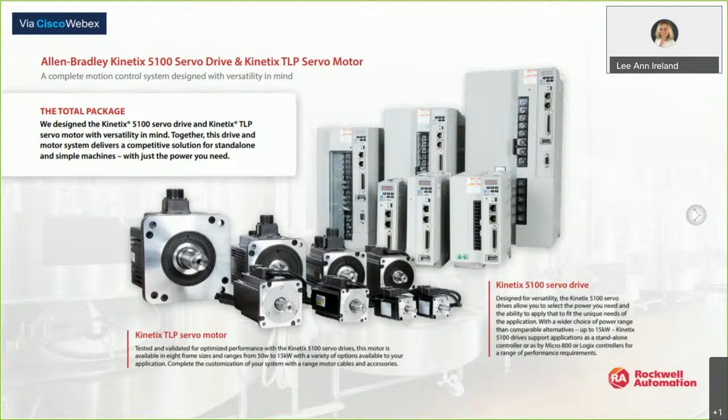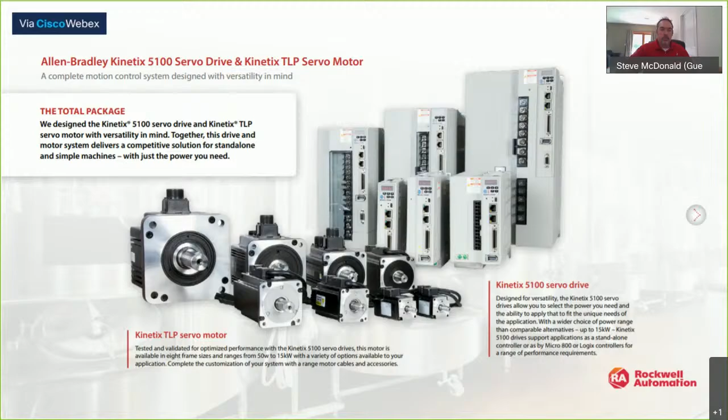As promised, the overview. Currently available is the 100 and 200 volt single phase and 200 volt three-phase drives. Soon we should see the release of the 400 volt class drives and motors. The Kinetix 5100 benefits include easy system sizing. We'll get into more detail on the drive and motor sizing in future slides.

Backward compatibility currently supports MPL motors for customers migrating from Ultra 3000s due to end of life, or the active Kinetix 300 models as needed for your applications. This year, we should see TL and TLY support for the Kinetix 5100 also. Very cost competitive, designed to run standalone with Micro 800 PLCs, discrete, or with CompactLogix or ControlLogix processors.

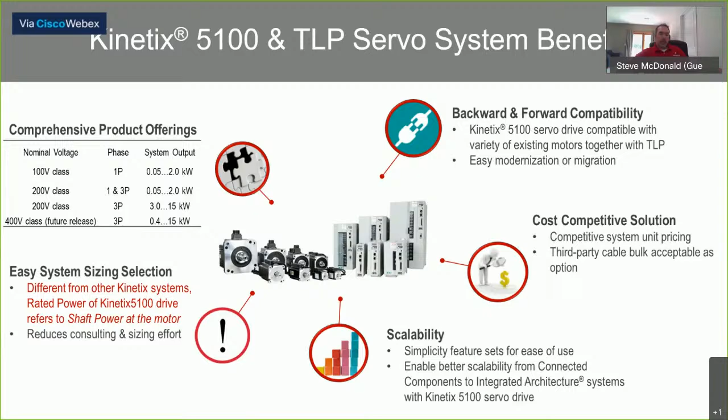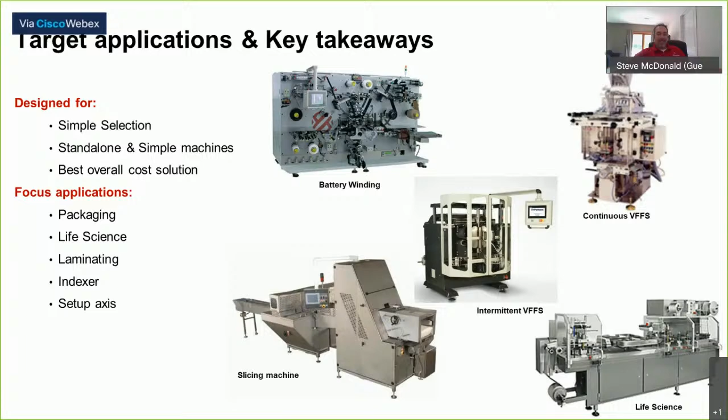Target applications. Here are some example applications designed to be easy to select, easy to use, cost-effective, yet full of features. The drive will run simple speed control, torque control, indexing, even advanced features like gearing and camming. Now let's take a look at the drive details.

Some key features of the Kinetix 5100 drive: hardwired STO or safe torque off, onboard I/O, 10 digital in and 5 digital out, 2 analog in and 2 analog out. These are all configurable. 2 fast digital in also. Auxiliary feedback port for second encoder or other feedback device for dual loop control as needed for your application.

Currently runs the MP and TLP series motors. Soon there'll be support for the TL and TLY series as discussed before. Remember, the 200 volt class motors, the MPA series currently. Soon, the 400 volt class motors, the MPB series.

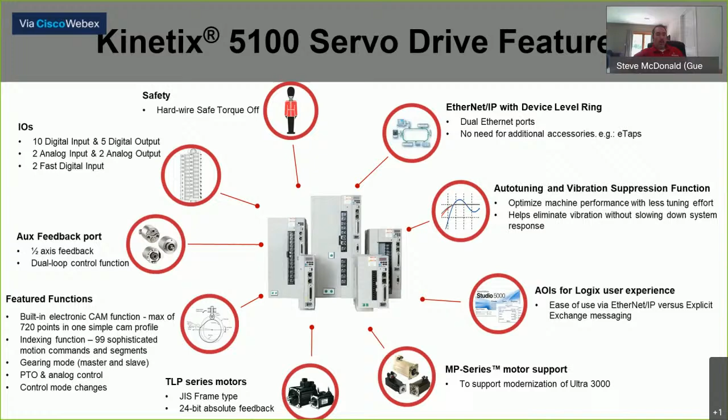There's a solid set of add-on instructions available for download from the Rockwell PCDC. If you're familiar with Rockwell motion commands, these add-on instructions will look and feel the same. Enhanced auto-tuning and vibration reduction features. The drive comes standard with dual port Ethernet for daisy chaining or DLR, device level ring.

Here's where the Kinetix 5100 sits in the Kinetix 5000 class family. Kinetix 5100, great for use on standalone or lower axis count machines. Use it with Micro800s, CompactLogix, or standalone, discrete, pulse train output, or analog. Coming soon, the Kinetix 5300 will add entry-level CIP motion for low axis count machines.

Next up, we have the Kinetix 5500. This has support for single cable VPL motors and network-based safety options for medium-sized machines with lower axis count. Next, we have the workhorse of the Kinetix line, the Kinetix 5700, for higher axis count or higher performance applications. This also adds advanced safety and regen power capability. Contact your local rep if you need specific application guidance for which Kinetix drive to select.

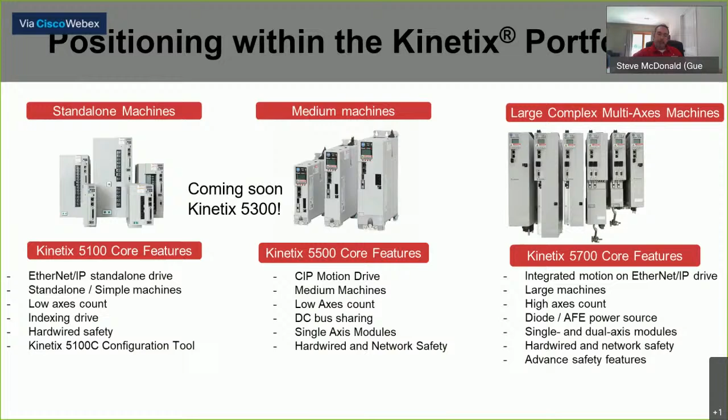Now let's get back to the main topic, the Kinetix 5100. There are 8 sizes, 6 frames, up to 15 kilowatt drives. You can run 95 to 132 volts AC single phase with reduced output power, or 170 to 253 volts AC single phase, on the whole range of drives. You can run 170 to 253 volts 3-phase input power today. Once again, there will be a 400 volt class input of the Kinetix 5100s out soon.

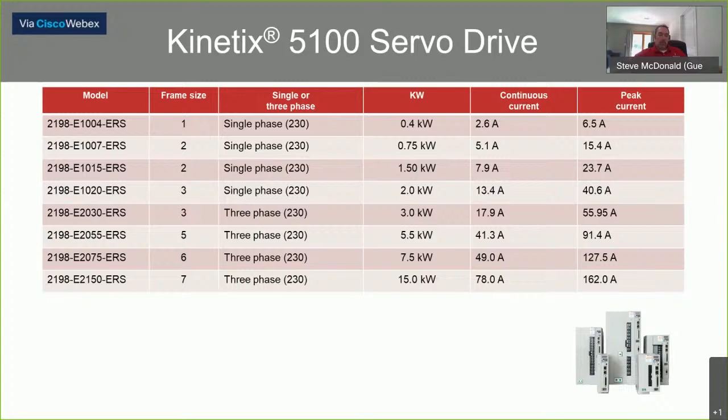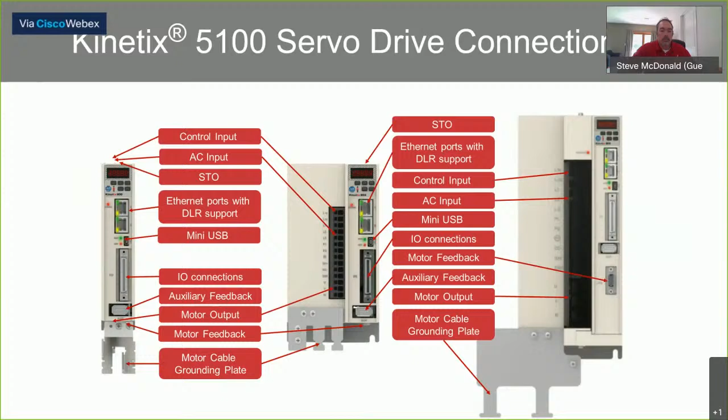Now let's take a look at the Kinetix 5100 catalog structure. The Ultra3000s are 2098. The Kinetix 300s are 2097. And then in the 5000 class, the Kinetix 5500s are 2198H. The Kinetix 5700s are 2198S for single axis and D for dual axis. And the Kinetix 5100s are 2198E for EIP. Soon you'll have the Kinetix 5300 at 2198C for CIP motion. Then you have currently today the 2 voltage classes, the power rating, and the hardwired STO only.

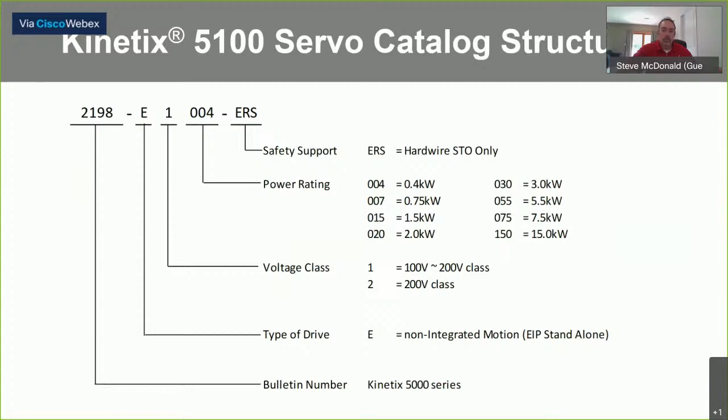Now let's talk about the TLP motor. The TLP motor range goes over 17 times larger on continuous torque and 14 times larger on peak torque than the TL and TLY motors. This gives you a far greater power range and far better coverage in the lower axis count machines. Flexibility in torque and speed gives you a better motor selection for your application. Currently, there are 18 TLP motors and 23 MPL motors to choose from for the Kinetix 5100. When the 400 volt AC class comes out, there will be many more. The Kinetix 5100 gives you another active option in the standalone drive class.

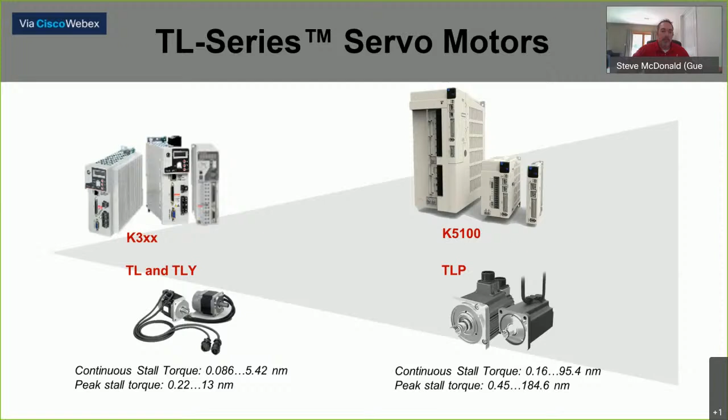As noted earlier, the TLP motor has wide product coverage. The mounting flange is designed for TL or TLY migration. We will get into the cable details more in upcoming slides. 24-bit absolute encoder with multi-turn capability.

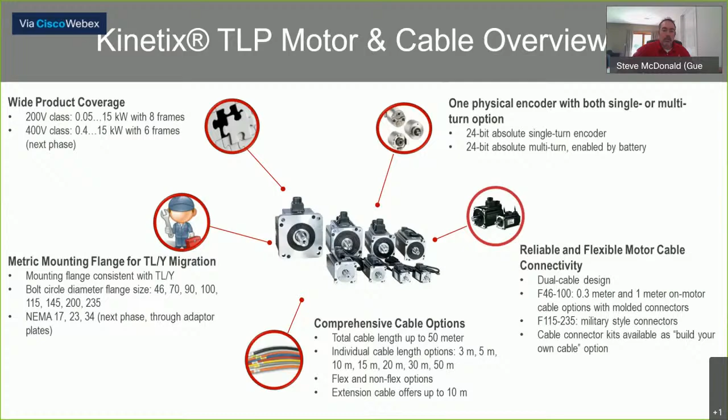The motor part number starts with the series like previous motors. The TLP series has similar voltage designator as the MPL and VPL motors. You have an A for the 200 volt class motors, and a B for the 400 volt class motors. Then you have the frame size. And now instead of stack length and rated speed letter, you have the rated power of the motor.

Feedback, currently D is the only option for the 24-bit single or multi-turn encoder. J for keyed shaft and K for smooth shaft, like previous motor models. The connectors, rectangular with a 0.3 or 1 meter cable, or military style for the larger frame motors. Brake, as before, 2 for no brake, 4 for a 24 volt DC brake. And finally, factory options, A for no shaft seal and S for seal.

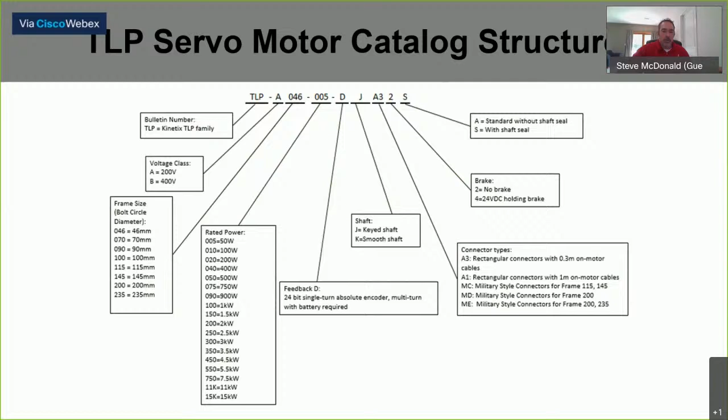TLP cables. 2090C is the number designator for all Kinetix cables. Cable type power with brake, power without brake, feedback, or just the brake cable. Motor cables are flying leads on the drive end with power wires going to terminals, and feedback will be a 15-pin D-sub connector for the TLP motor. The largest 2 motors, you have a separate brake cable. Extension cables are also available in 3, 5, and 10 meter cable lengths. The next value will be the wire gauge for power cables, or CF for feedback. Then flex or non-flex, and the length in meters.

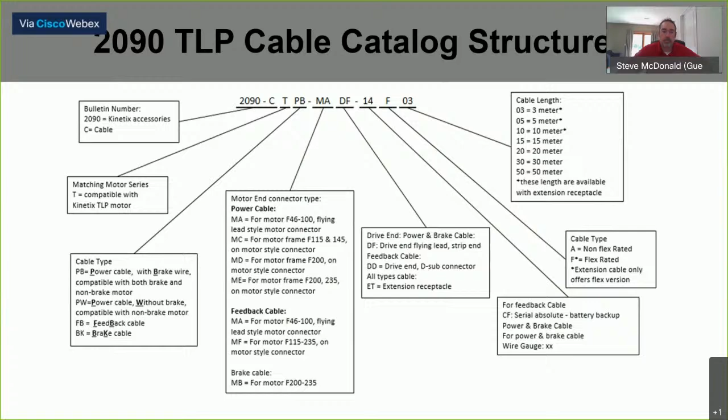Now let's briefly look at some of the tools available for system design from Rockwell. The Kinetix 5100 is on Motion Analyzer online today. Motion Analyzer is a very powerful sizing application. It's free to use. There's no software to install on your computer. You can create applications and share them between departments, like between mechanical and controls. You can also share them with your customer.

At McNaughton-McKay, we create Motion Analyzer applications daily. Sometimes we share them with customers. Sometimes customers share them with us for review.

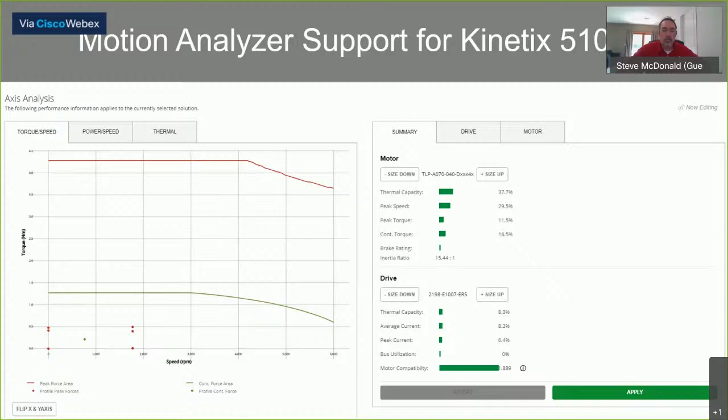Another tool is ProposalWorks. It's a free software that helps you build your system. This requires a download, but it is well worth it. It is an up-to-date catalog of all of the Rockwell and some Encompass partner part numbers.

And finally, a list of the publications currently out for the Kinetix 5100. The selection guide, technical data, and user manual have everything you need to design and implement your servo system.

Now let's take a look at what it takes to make one move. First, we'll start with the Micro 850 PLC. KNX5100C software is available for download on the Rockwell PCDC website. We can start a new application. Call it Project 9. As you can see, it's already grabbed my COM port. I've plugged into the drive with a USB cable. We'll add this to the project.

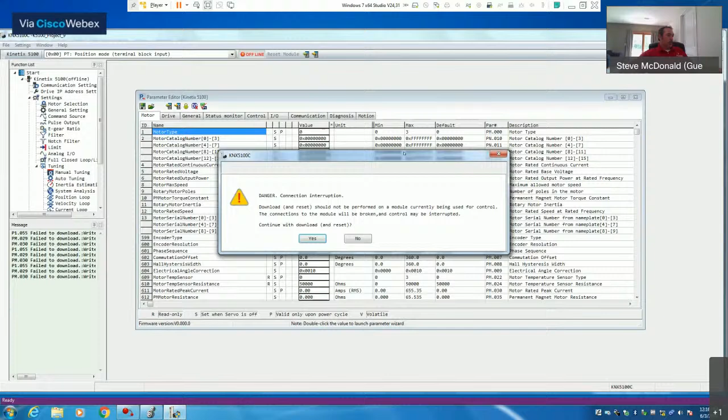We can go online with the drive. We'll download all the parameters as a basic program. Now we're online with the drive. We'll change it to position mode for PR, position register, for our index.

Now that we're in position register mode, we'll set our drive IP address. We'll set this IP address to 20. Now we'll go into our motor selection. We'll select motor NV as the default. That's for motor non-volatile memory. This will go out and look at the motor and encoder and bring it into our application.

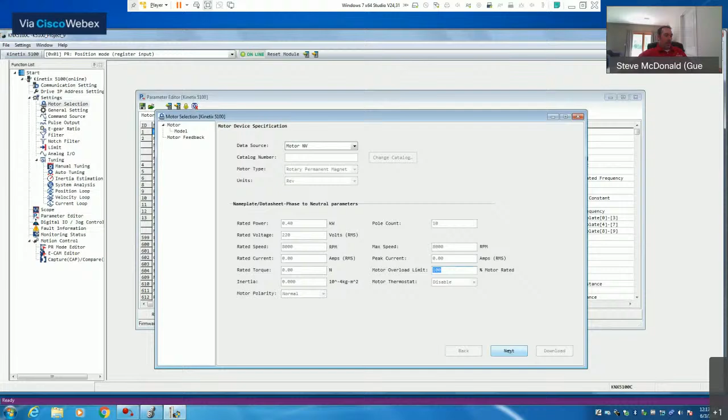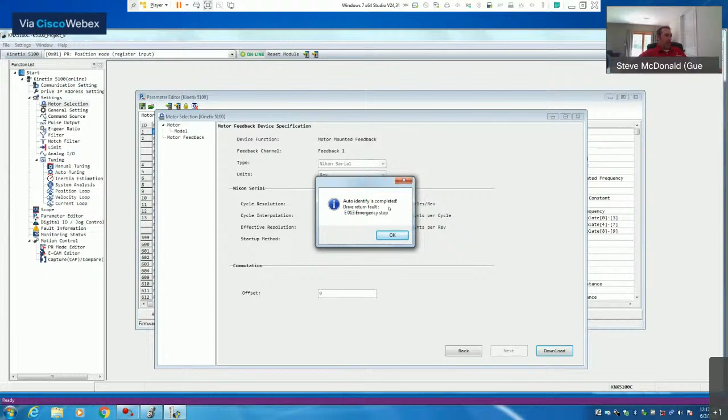At this time, you can change the overload limit if required. We won't need to change that today. All default values. Next again. Now we can download this to the drive. Currently, it's in emergency stop. Downloaded it to the drive. Auto identify is completed. Sees our encoder. Now we can close our motor.

Now we can go into our position register mode editor. We'll go to our position register 1. We'll set this to a point-to-point command. We'll make it a relative for today. You can also do an absolute move. We'll make it 500 counts. Download that to the drive. Download OK.

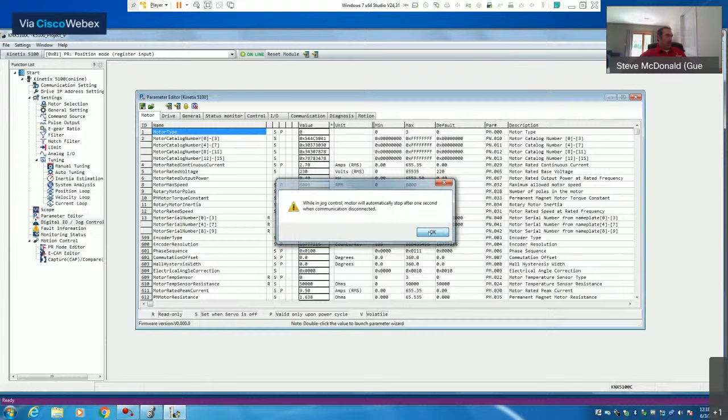Now finally, we'll set up our digital I/O. And our digital I/O for today, we'll edit our I/O configuration. We'll change our servo on to a normally closed. And then the rest of the inputs we'll disable. Don't forget to hit OK because it will revert back.

The most important ones are these overtravels and the emergency stop signal. Now you see our servo is enabled, because we had an emergency stop before. We'll reset the fault. Servo is ready and at 0 speed.

Now we can switch over to the Connected Components Workbench. We'll create a new application and call it Live Demo. We'll add our controller. Today we're using a Micro850, 24 QBB. Add it to the project. While we're here, we'll set our Ethernet IP address, and that was 20. Subnet mask will automatically populate.

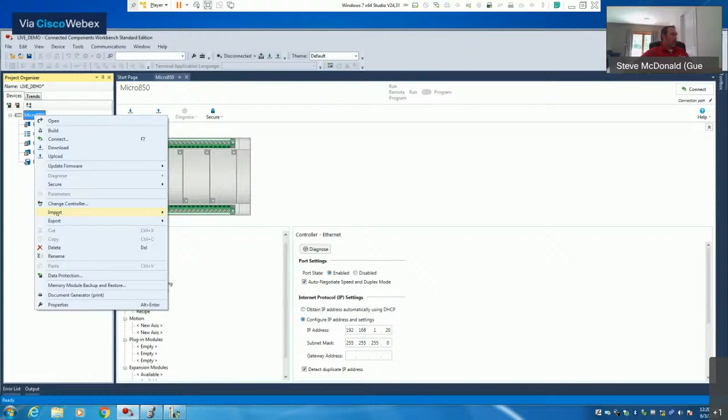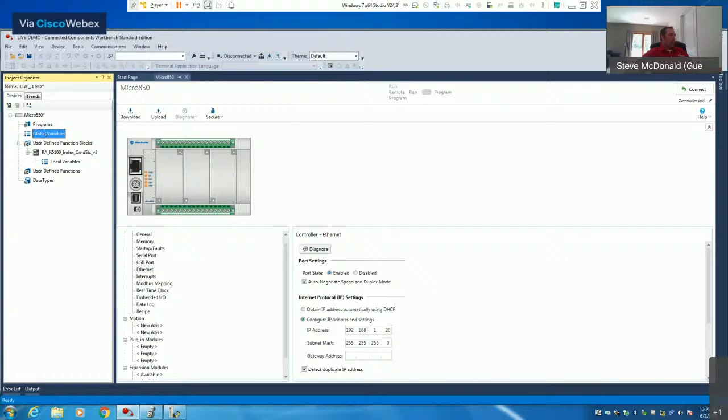And here is where we'll import the exchange file. This file was downloaded from the Rockwell sample code website. It's our Kinetix 5100 index command. This brings in everything we need, our user-defined function block. We can also create a couple variables. We'll create a toggle bit, and we'll create a servo index.

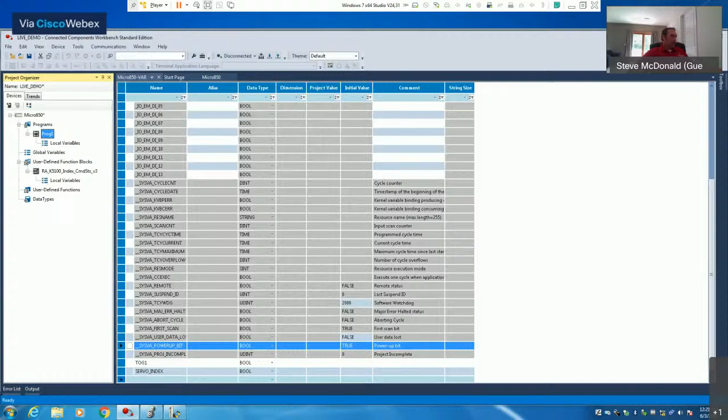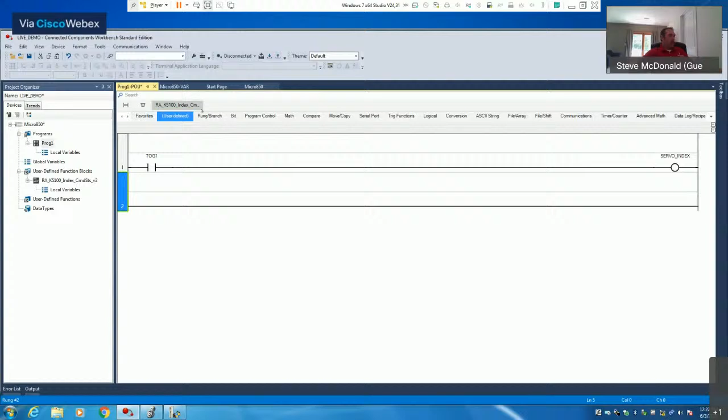Add a new program. Open our program. Now we can start writing our code. This will be our toggle bit, our coil, servo index. Add one more rung. Now you'll see our user-defined block has been brought in here. Single click. Let's view our properties and make this wider so we can see our block.

On our block, our first item is our IP address string. 192.168.1.20 is our drive address. The index was index 1. Command servo on, we're running that through, we're forcing that on. Servo off we won't need. Run index. We'll put our index in. And that's all we need.

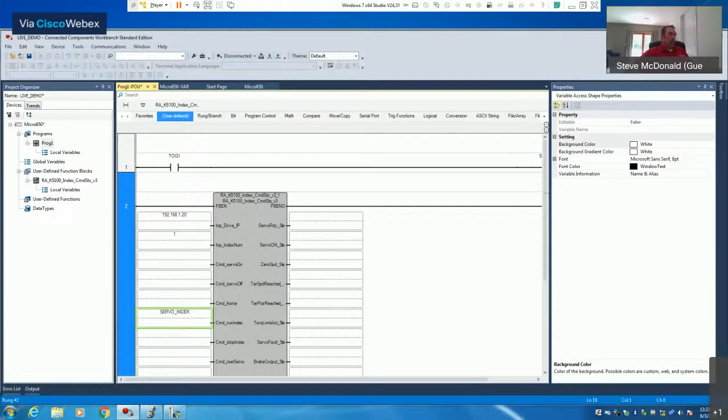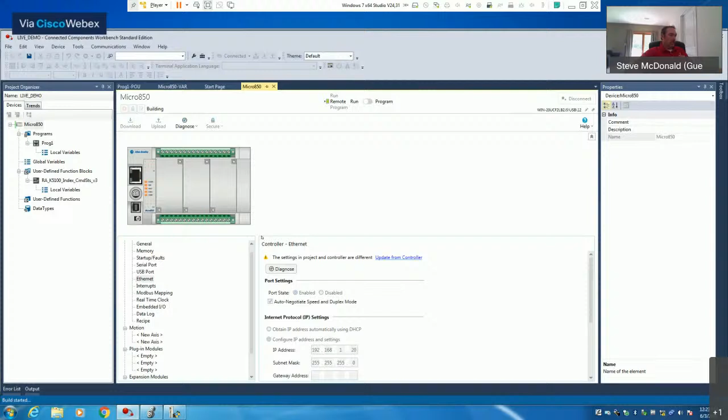Now we can connect to the drive, connect to the PLC. I'm connected over USB. Download current project to the controller. Yes, we'll overwrite the program that's in it. Download complete, change it to run mode.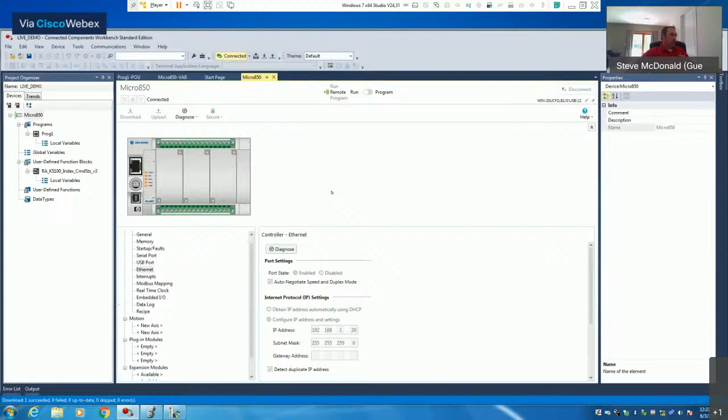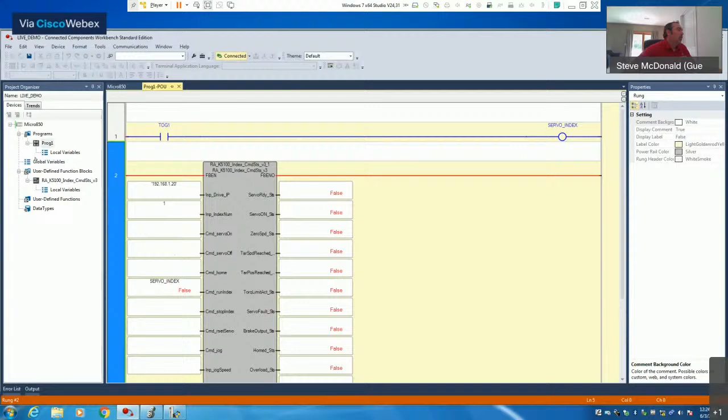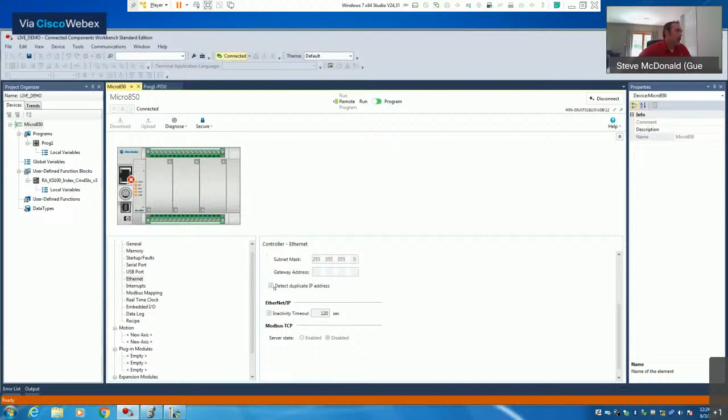So, 192.168.1.20. IP address conflict. Well, regardless, if there wasn't an IP address conflict, this is all of the code required to index the Kinetix 5100 with a Micro850.

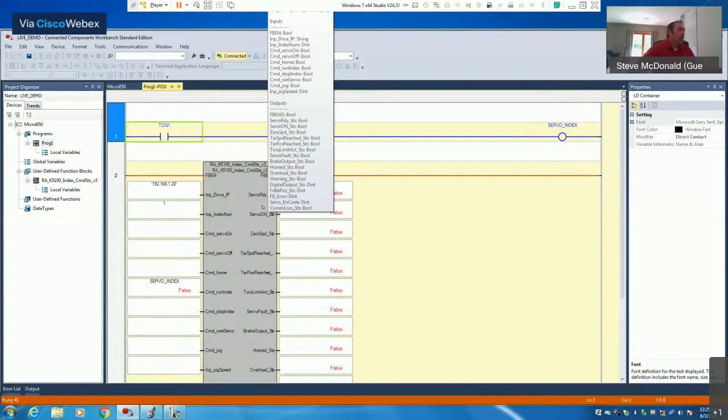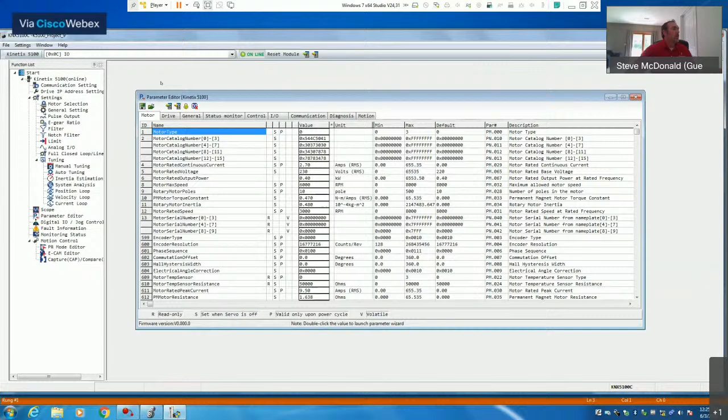Let's move over to the code for Studio 5000. So first, on our Kinetix 5100, we need to change from PR to IO. Download the IO mode. Now we can start a new application for our CompactLogix PLC. Today we'll use an L18. We'll just call it demo. Zero modules.

Create our new application. We'll start by bringing in our user-defined data types. Import data type. These were downloaded from the Rockwell PCDC website also. We'll bring in all three data types.

Now that we have our required data types, we can bring in our add-on instructions as needed. The only add-on instruction that we need for today is the motion axis index, or the MAI. You have fault reset, motion axis gear, home, jog, move, as you would in a typical processor.

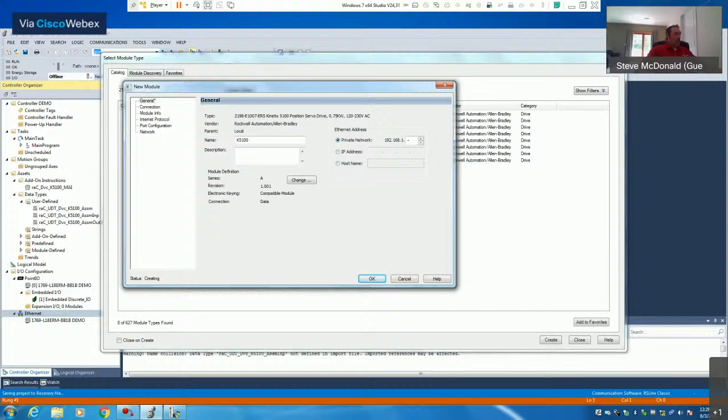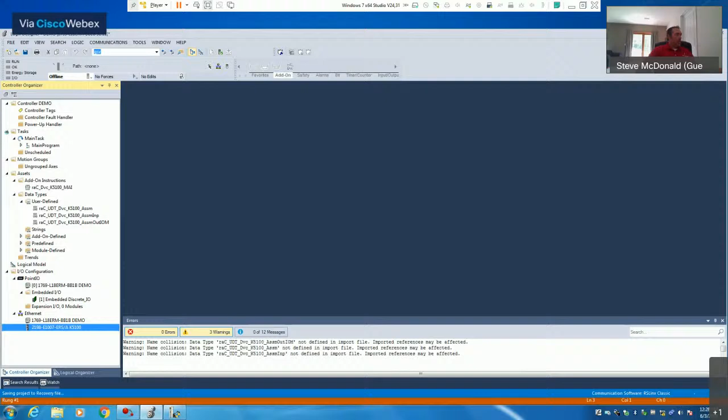Today we have a 0.75 kW drive. Double click, or you can hit create. Give it a name, an IP address, now we have our drive, we have our add-on instruction. We can start creating our logic. For today, we'll just put it in the main routine.

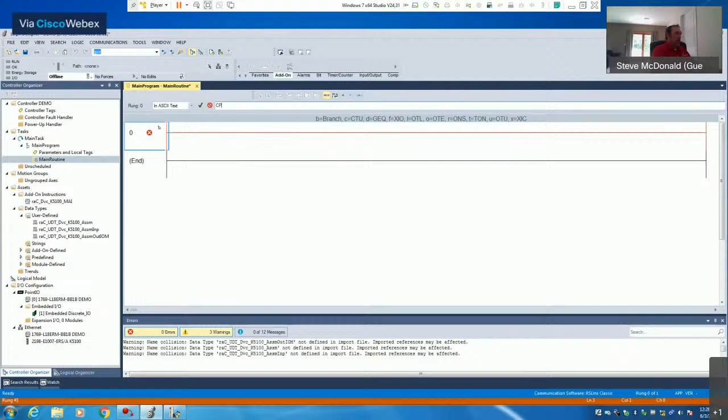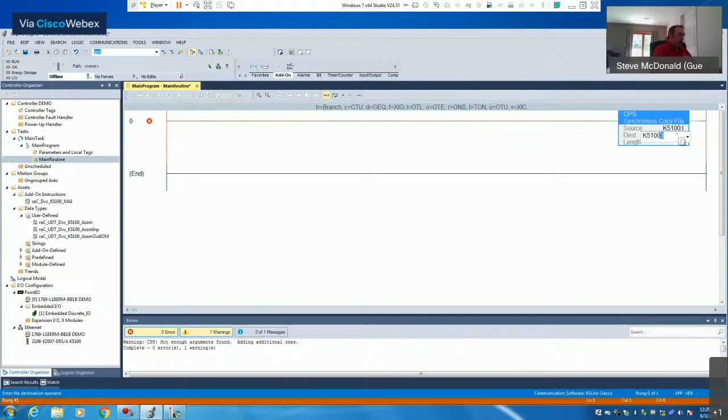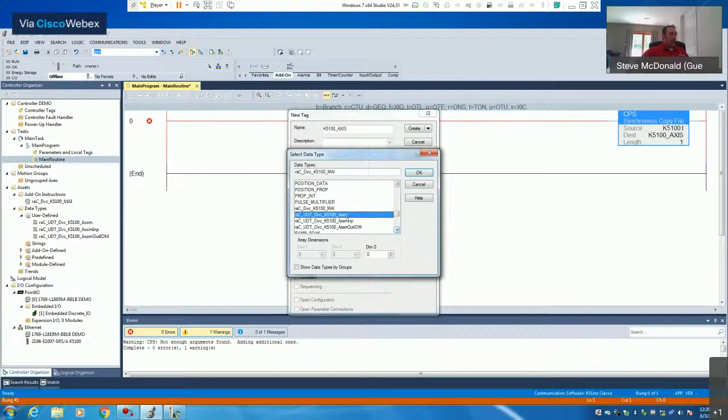First thing that we need to do is bring in a CPS. The source will be our Kinetix 5100 inputs. The destination will be a new tag that we create for a length of 1. Create this new. The data type will be a raC for our Kinetix 5100 UDT assembly data.

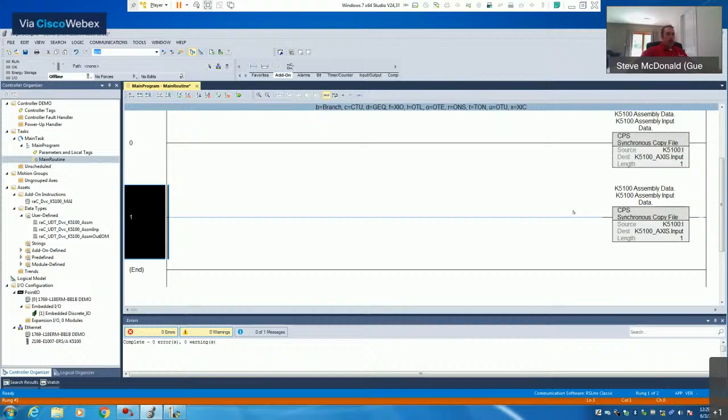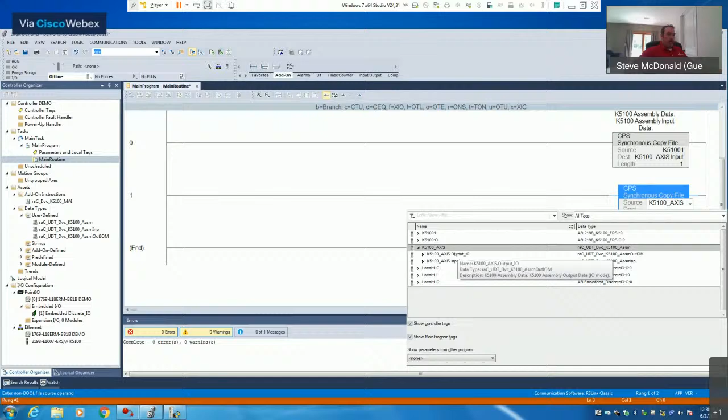Now that that's created, we'll make that the input, for a length of 1. And while we're here, we'll create the output. So we can change this to O. Move it down here. That'll be our K5100 output I/O. That'll take the outputs from the processor and send them to the drive.

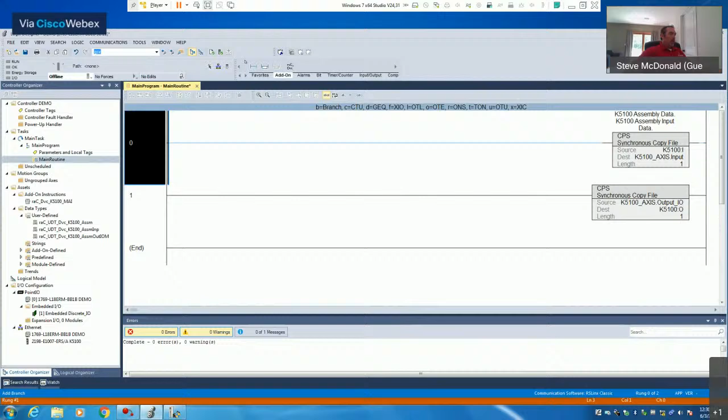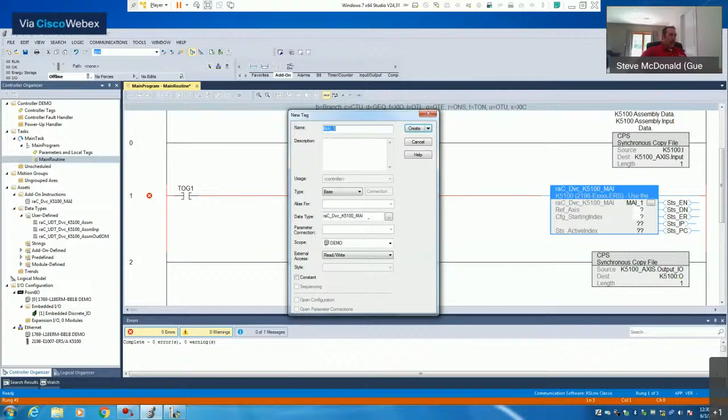And now we need to throw in a toggle bit, and then we can throw our add-on instruction, our motion axis index. Don't need those or that. Toggle 1. New Boolean. Now this will be a new tag you create. We'll call that MAI_1. And since we're creating it in the MAI block, it knows the data type is MAI. Create that.

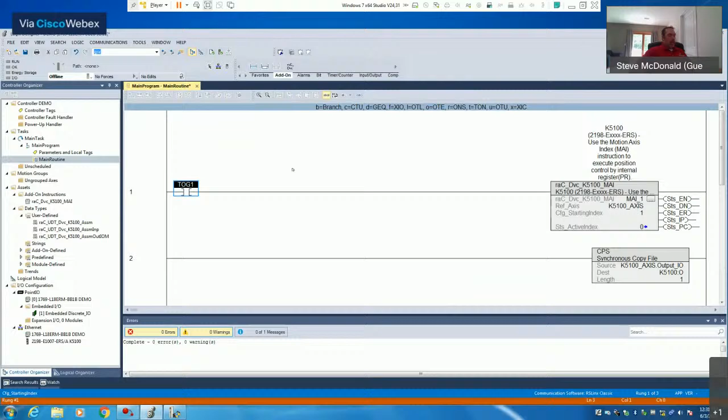Grab our reference axis, which is our Kinetix 5100. And the index that we're going to modify is index 1. And that's all it takes to create an index with a CompactLogix or ControlLogix processor.